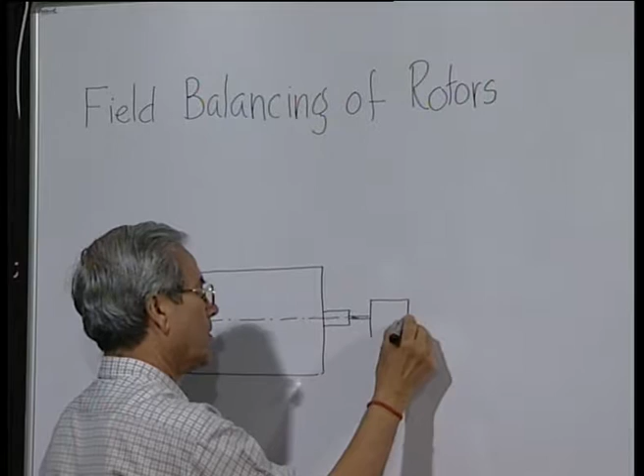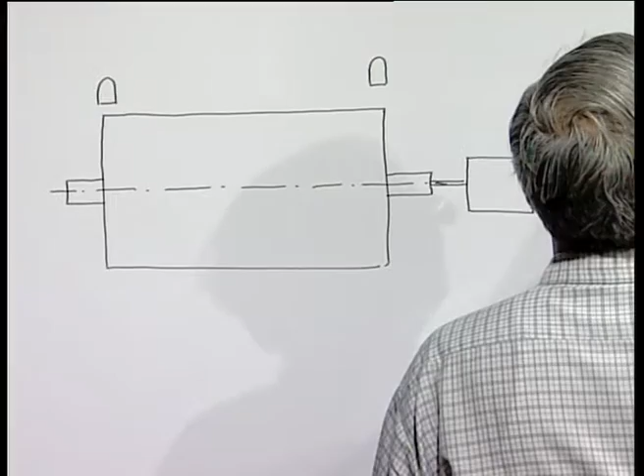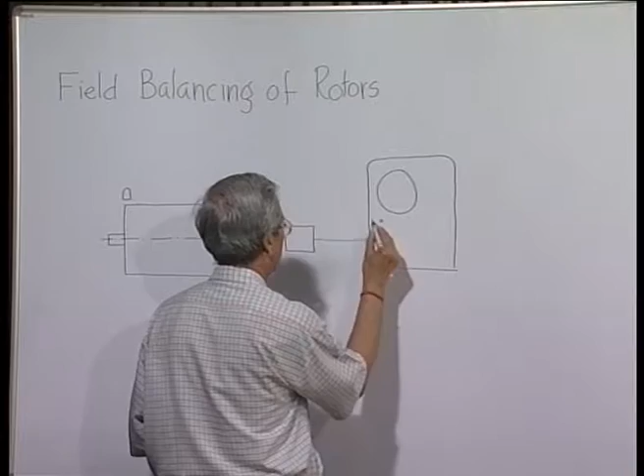We can connect it to a small device which we call a sine wave generator, and we have pickups at the two ends, and of course, we have a dual beam oscilloscope. So, the sine wave generator is connected to one, and the vibration pickups

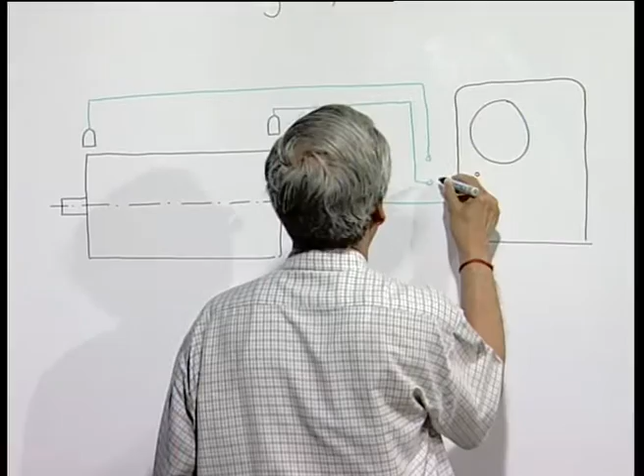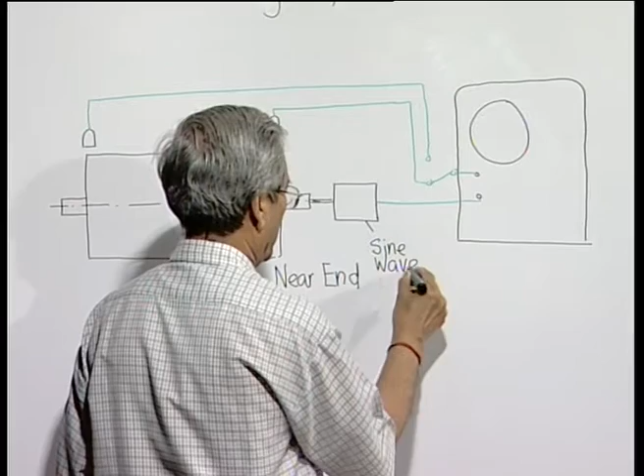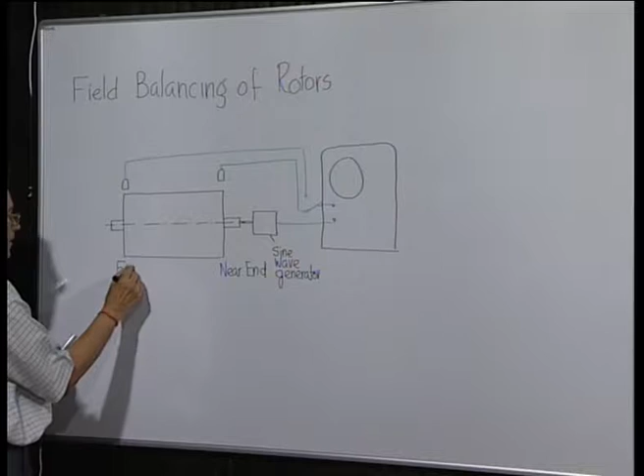are connected to this pickup, which we call the near end pickup. Near end means that it is nearer to the sine wave generator. And this is called the far end, and this is the far end pickup.

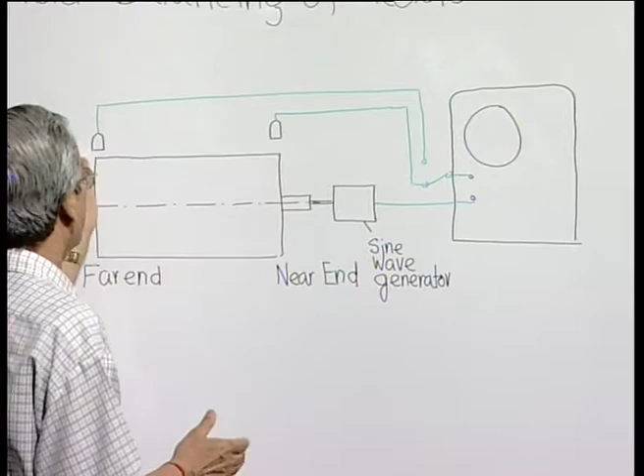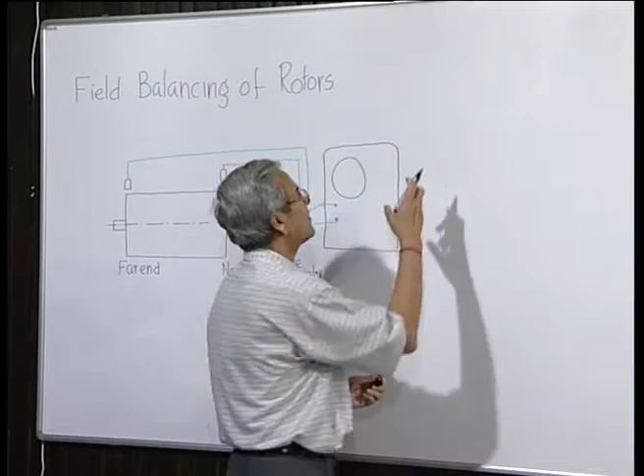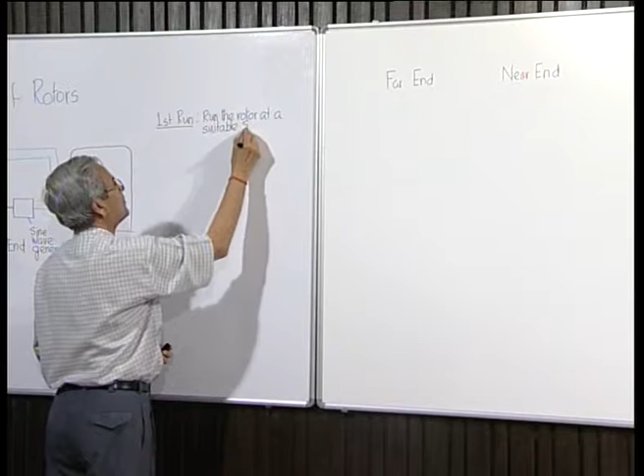Now, as before, we can rotate the rotor at sufficient speed, so that we get measurable vibrations through the pickups at the near end and far end, and at the same time the sine wave generator produces a reference sine wave. So, the first test is the first run: run the rotor at a suitable speed, so that we get measurable vibration, say a suitable speed omega.

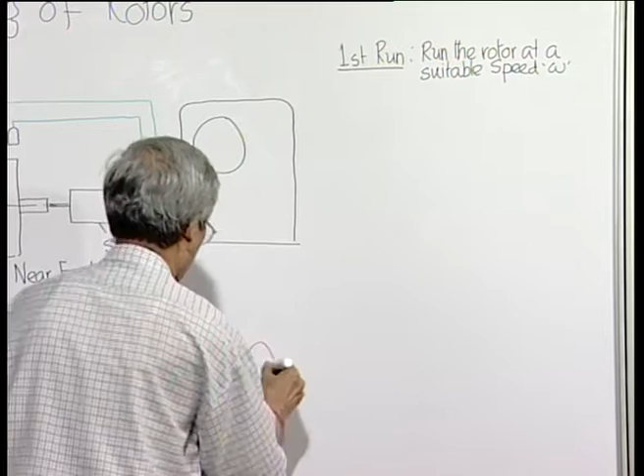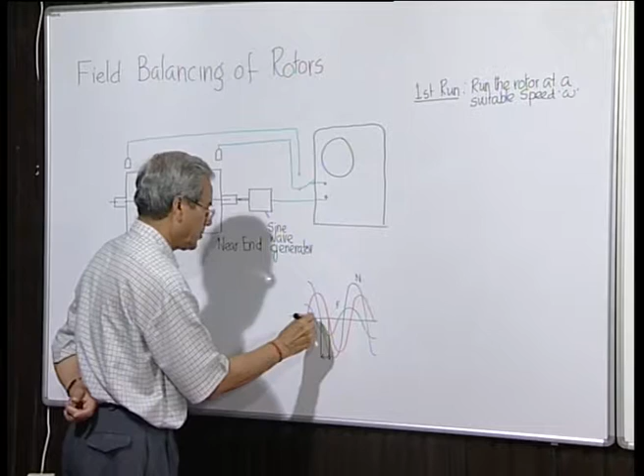Then, as we know already, the oscilloscope output will be giving a reference sine wave, and the other one, say near end, will be something like this, and the far end. So, these oscilloscope signals tell that this is the phase lead of the near end response, and this is the far end.

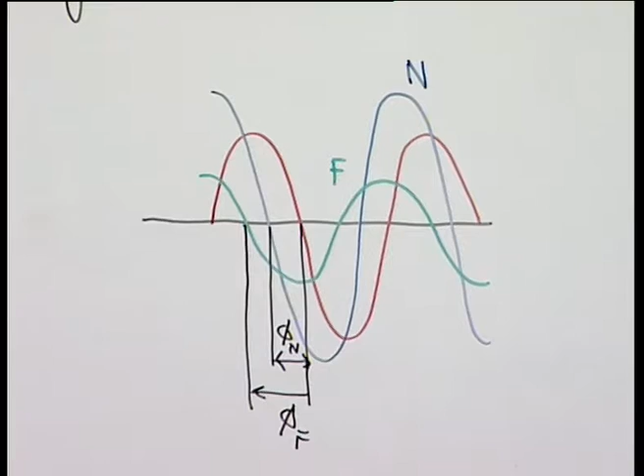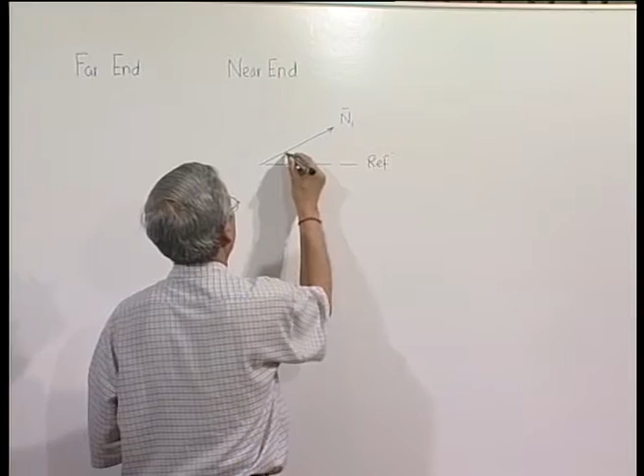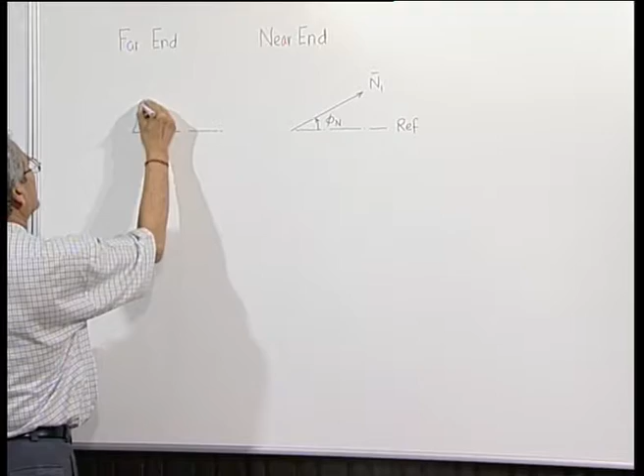So, the near end response we get as the N1 vector, and obviously the reference is here. The reference vector is nothing but the sine wave generator. Similarly at the far end, again the reference will be the same, and the vector representing the vibration of the far end is F1.

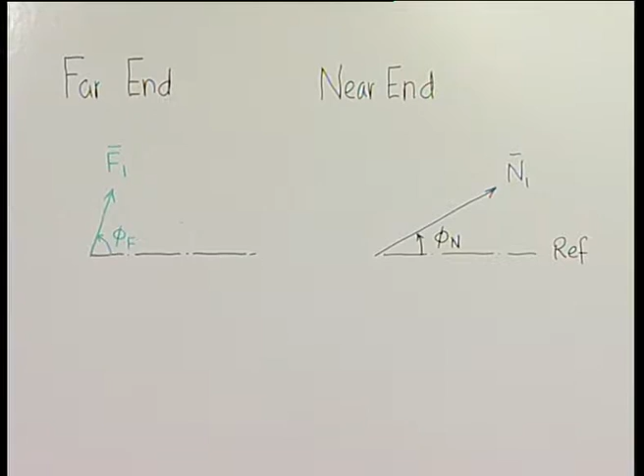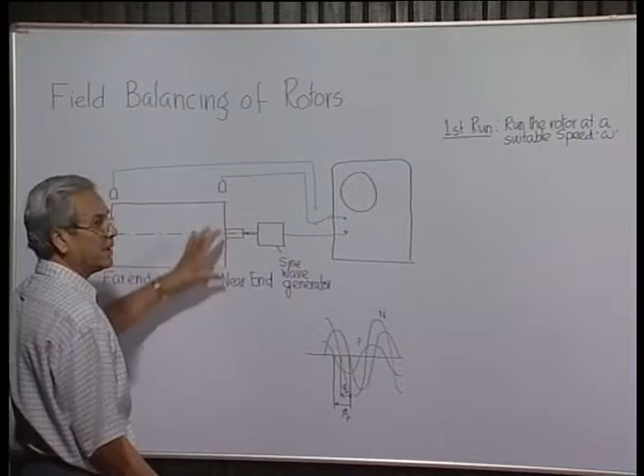So, let us see again what we have done. It is being rotated at a suitable speed, so that the near end pickup and far end pickup produce reasonably measurable signals. The sine wave generator is producing a signal as a reference. Then the vibration of the near end is measured like this, and the vibration of the far end is given by this. All of these are harmonic functions of time, because it is a case of forced vibration, and in all cases the frequency of vibration matches the speed of rotation. So, all these signals are of the same frequency.

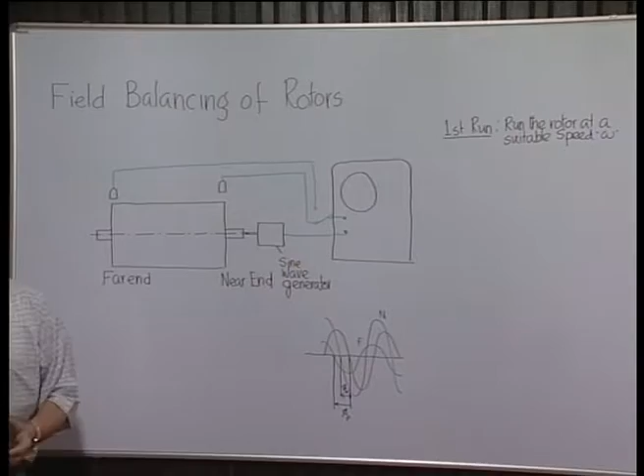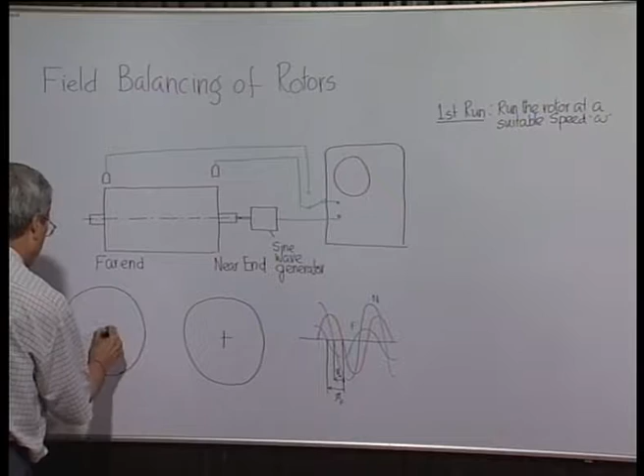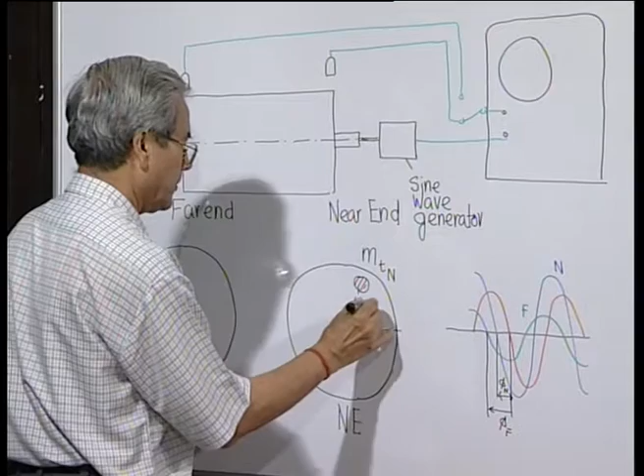Next, we stop the machine and let us see the near end and far end planes. This is the near end plane, this is the far end plane. We have a datum, a reference line marked, and attach a trial mass MT at the near end at a known radius at a known position. This is a datum.

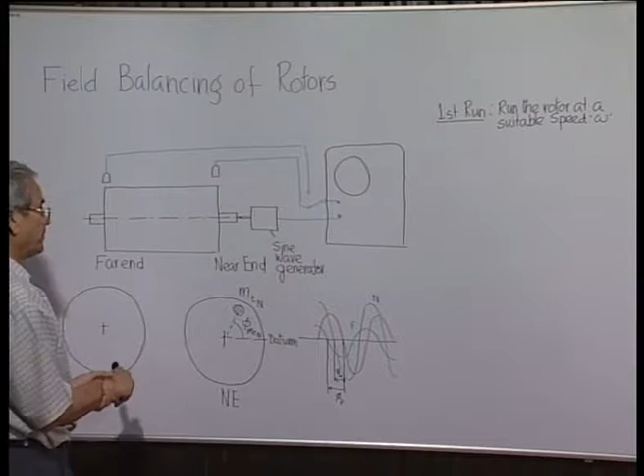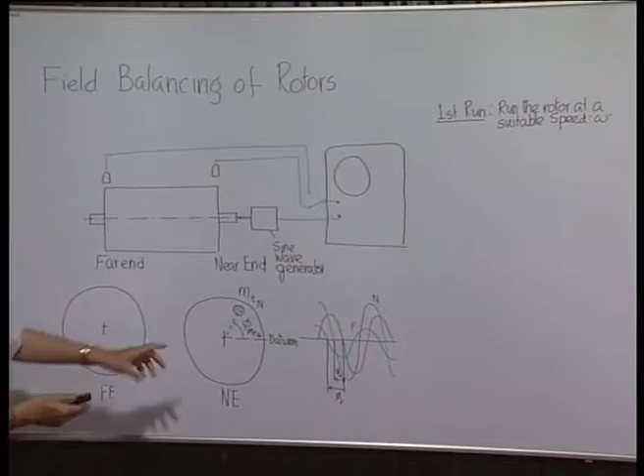After attaching this trial mass at the near end plane, you have to keep in mind that these are also the chosen planes for putting our balancing masses, or taking out material diametrically opposite the location of the balancing mass, as I have said in the previous lecture. Now, if we run the rotor at the same speed and again measure the vibration of the near end and far end, what do we get?

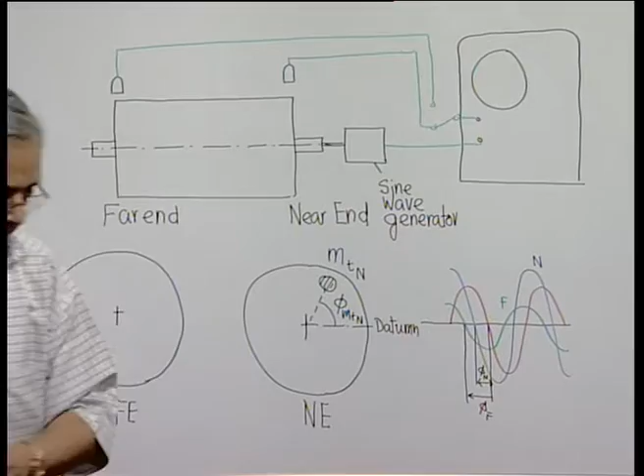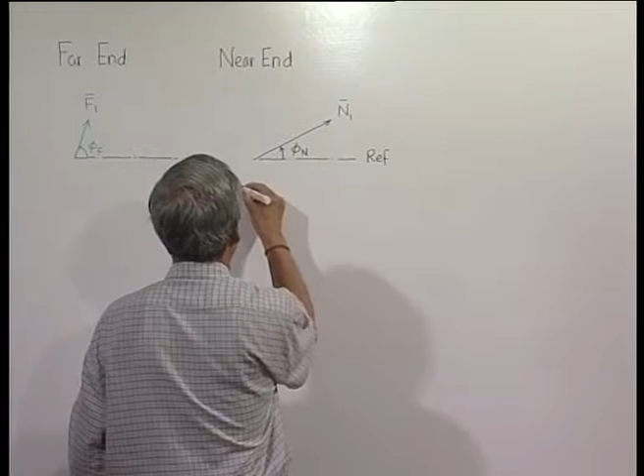Now, we will find that the effect of this trial mass which we place at the near end will obviously be more on the near end vibration. So, the vibration of the near end is now N2, and this is the reference as before. This angle is the lead angle of the wave found in the oscilloscope with respect to the reference sine wave signal.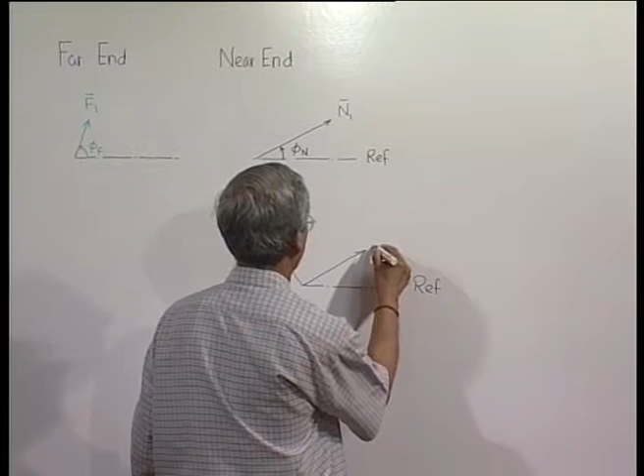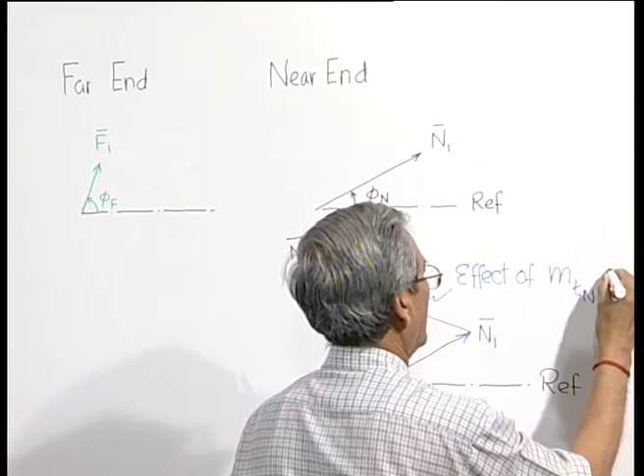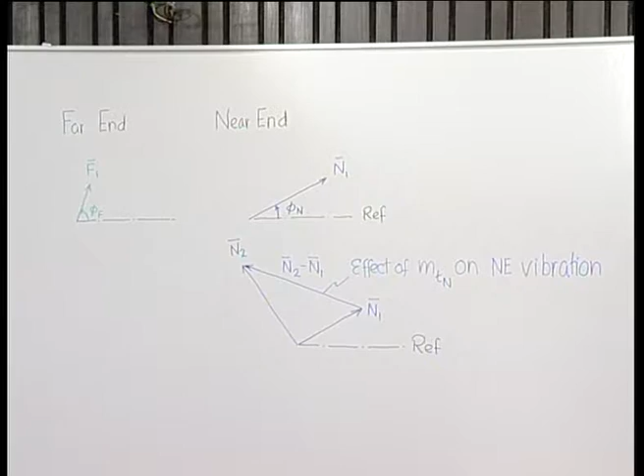Now, when we did not attach the trial mass, the vibration of the near end was this. So, this vector represents the effect of the trial mass on near end vibration. This is the original vibration without any trial mass MTN. This is the vibration of the near end with the trial mass. So, obviously, this difference is the effect of the trial mass only.

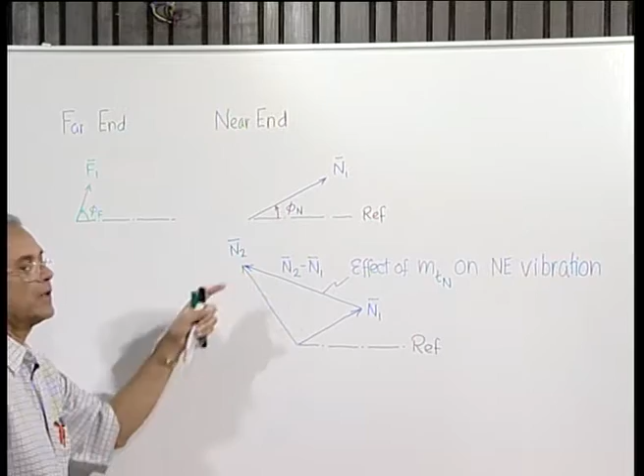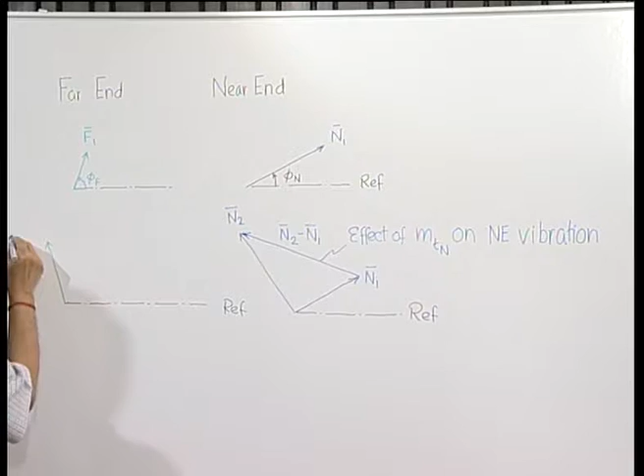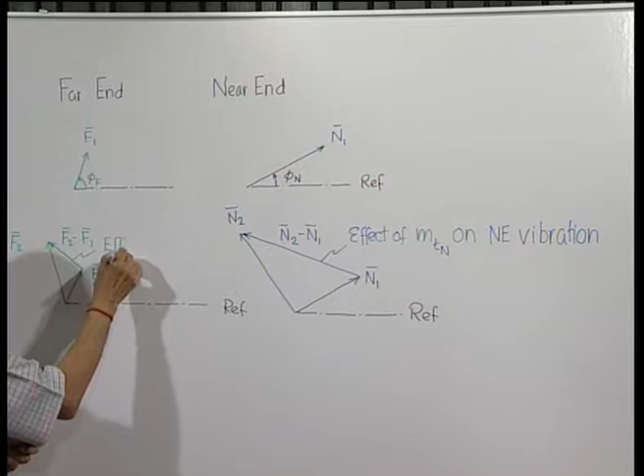Similarly, the vibration measured at the other end, that is the far end, will be something like this. The original vibration without MTN was F1. So, therefore, this increase, that is F2 minus F1, represents the effect of MTN on far end vibration.

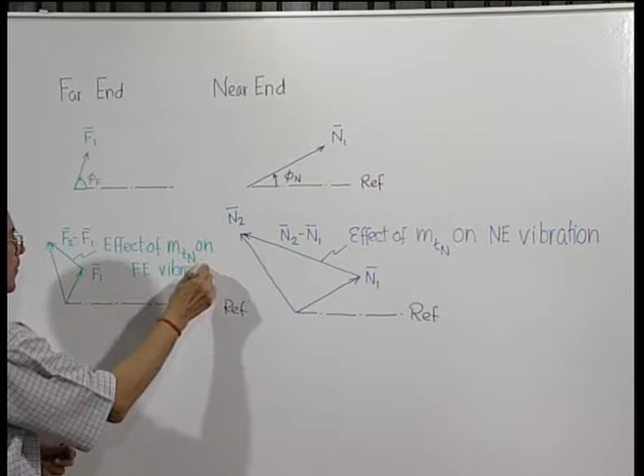Remember, these vectors are all rotating like a rigid body with the same speed as this, and the real quantity is the component along this. This is the way we represent a harmonically varying quantity. Okay. Next, what do we do?

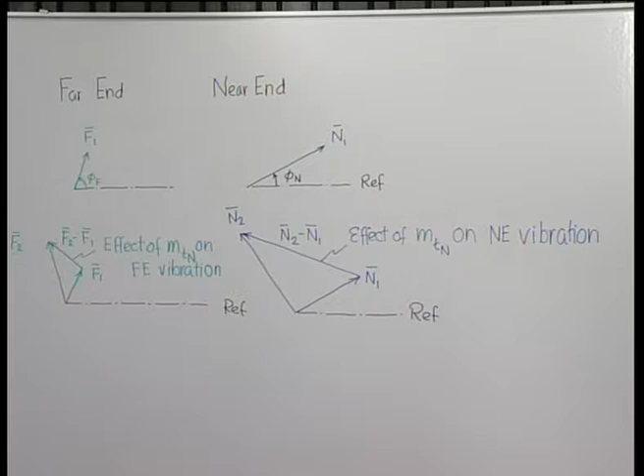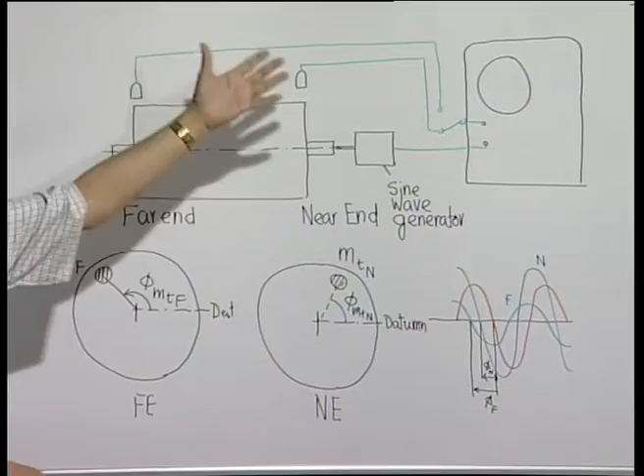We take out this MTN, remove it, and put another mass, and we call that mass MTF, at another known radius or known radial distance, at a known position from a datum drawn on this. Then again we run at the same speed, and the vibration at the near end and far end is again measured, both in amplitude and in phase. Then what do we get?

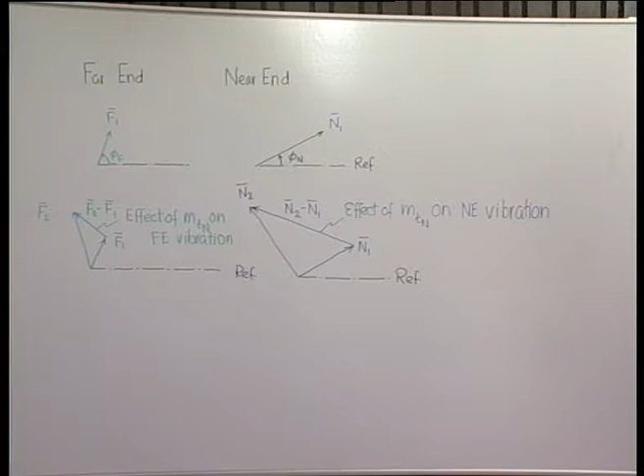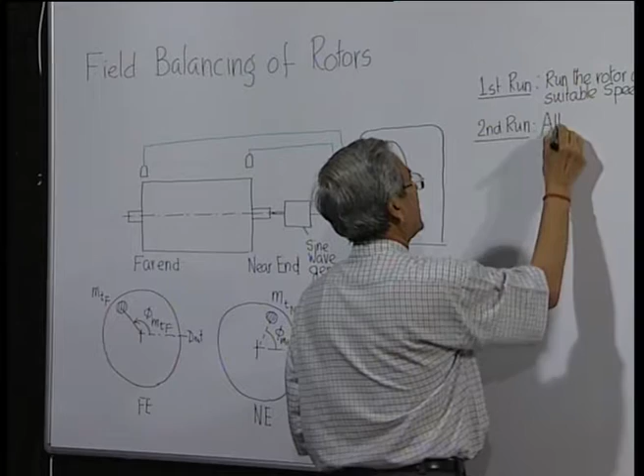So, we must complete also this second run. We have already completed it: attach a trial mass at the near end at a known radius and at a known angular position given by phi MTN. Then the third run at omega.

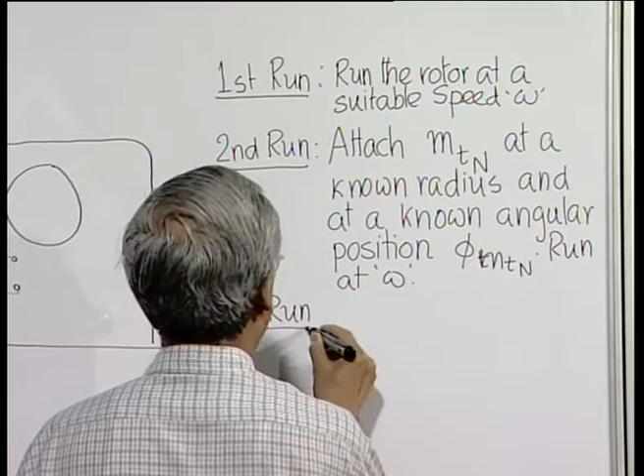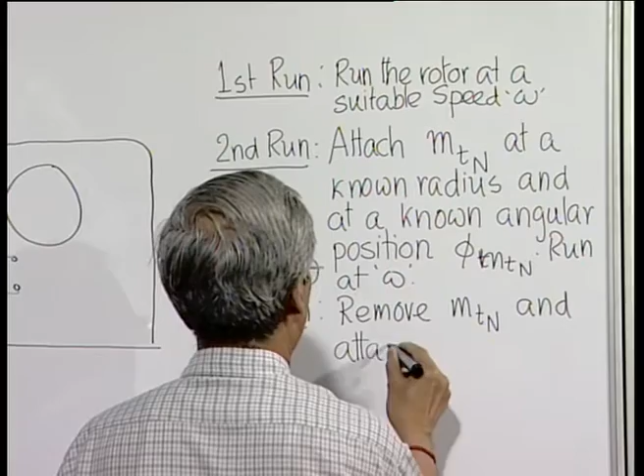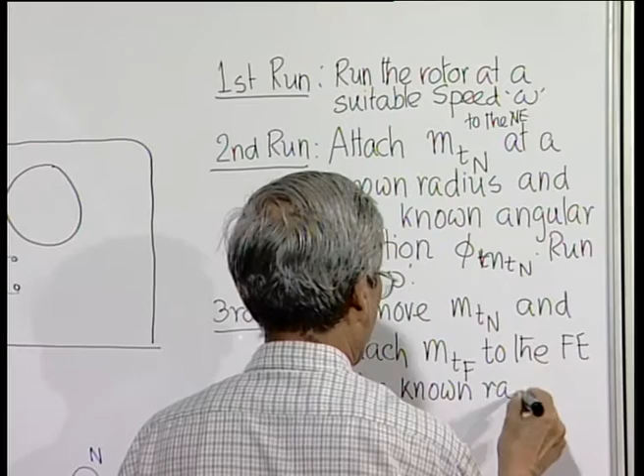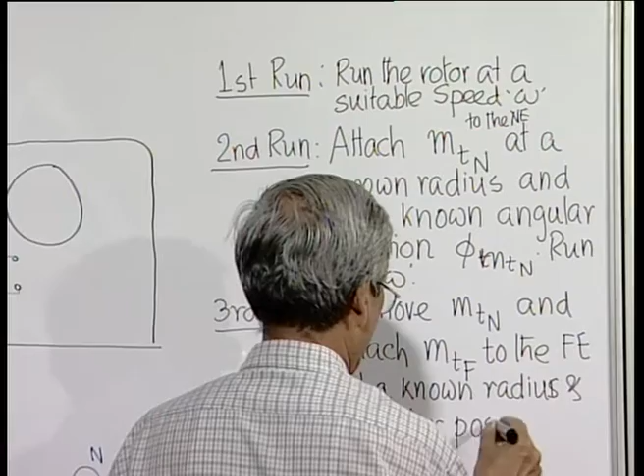Third run is: remove MTN and attach, I have not mentioned because space is not there, attach MTF to the far end at a known radius and angular position phi MTF, run at omega.

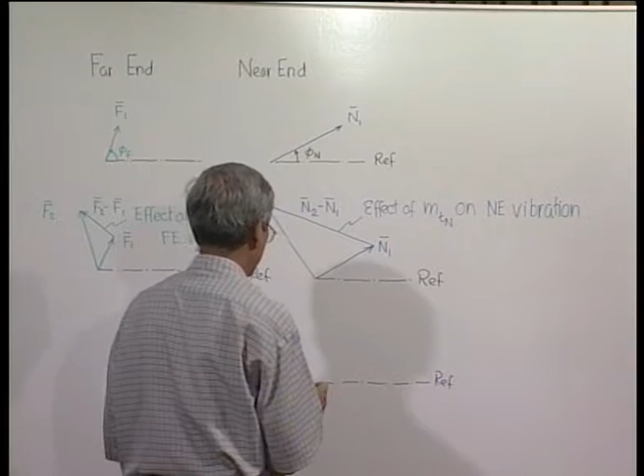So, now we again measure and we get N3. So, if this is the vibration at the near end without any attached mass, then this must be the effect of MTF on the near end vibration.

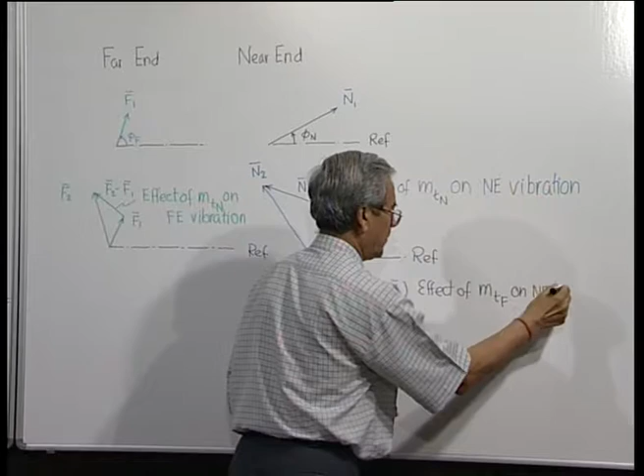Similarly, at the far end, the vibration is measured and we may get the far end vibration F3. The original one was this without anything. So, this F3 minus F1 must be the effect of MTF on far end vibration.

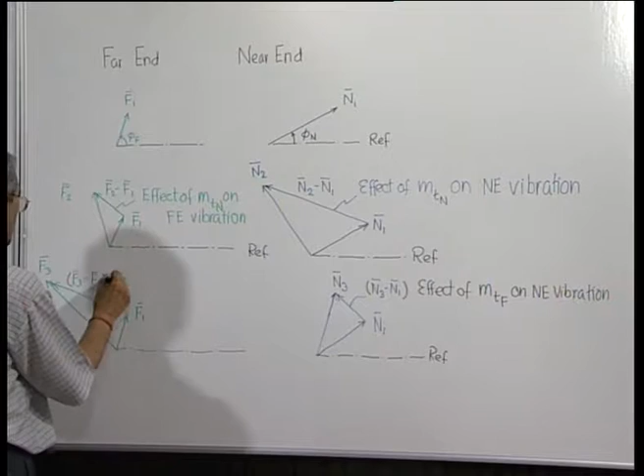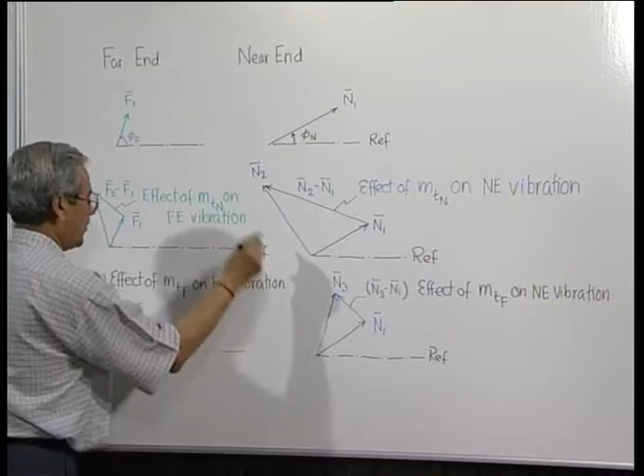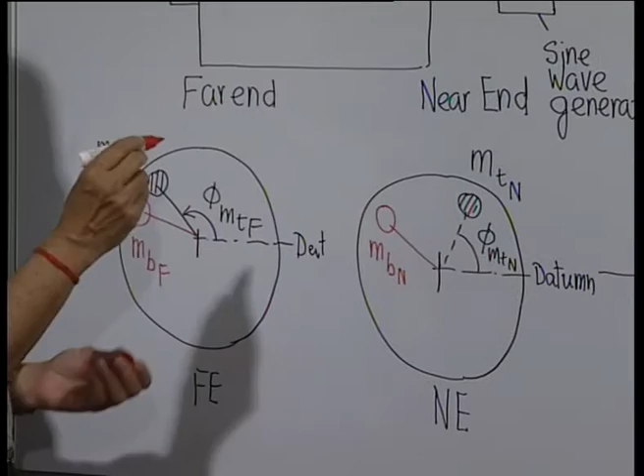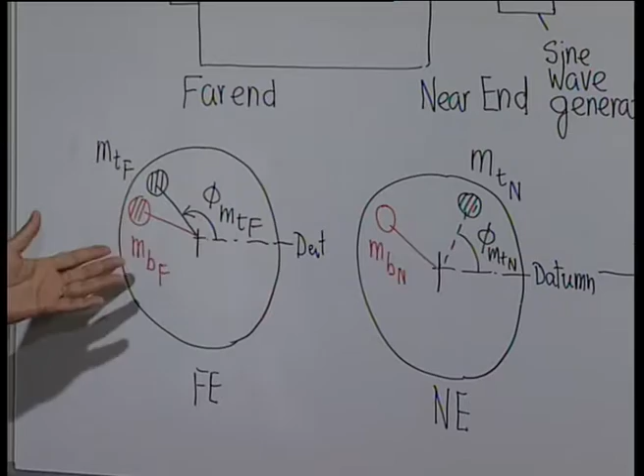Okay. So, now let us see what we can do after this. What we have to do ultimately is place balancing masses, say MBN and MBF. So, how do you do it? Remember that once MTN is changed to MBN and MTF is changed to MBF, then when both are placed there, the total vibration at the near end and far end should be 0.

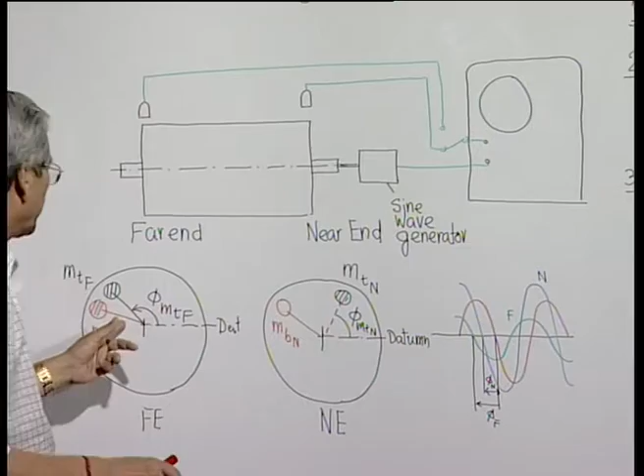That is, the effect of MBN on near end and far end vibration plus the effect of MBF on near end and far end vibration. When you sum the total, the near end vibration should be just minus N1 to cancel the original effect when no mass was attached, and the total effect on the far end should be minus F1 to cancel the effect of the original unbalance present in the rotor.

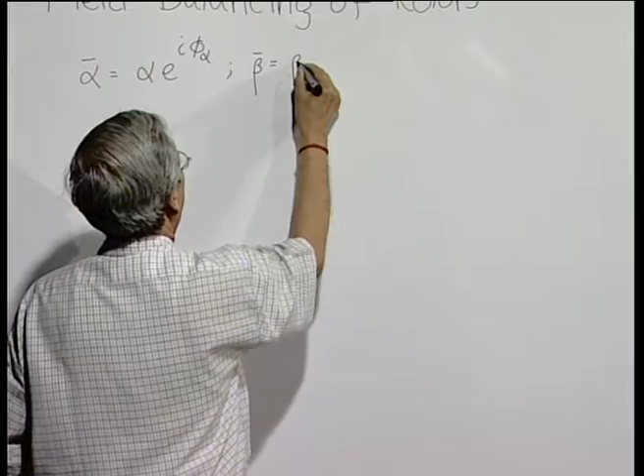Now, we have seen in the previous class how we represent these vector quantities. So, we will use that. We will have two vector operators: alpha, which is equal to alpha e to the power i phi alpha, and beta, equal to beta e to the power i phi beta.

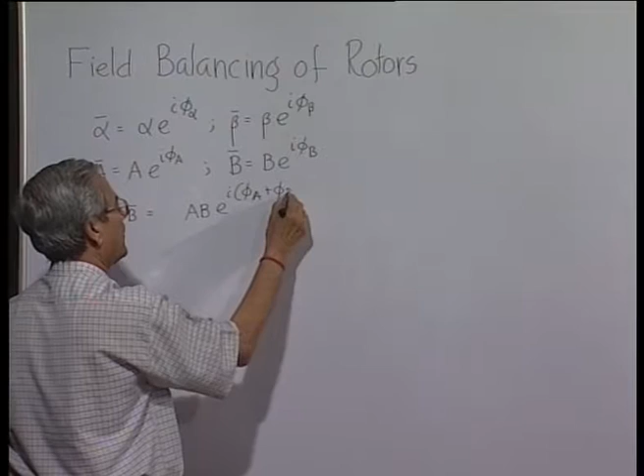Now, when two vectors, A represented by A e to the power i phi A and B equal to B e to the power i phi B, are multiplied, what do we get? We get a vector whose magnitude is the product of the two magnitudes and whose phase is given by the sum. So, remember this.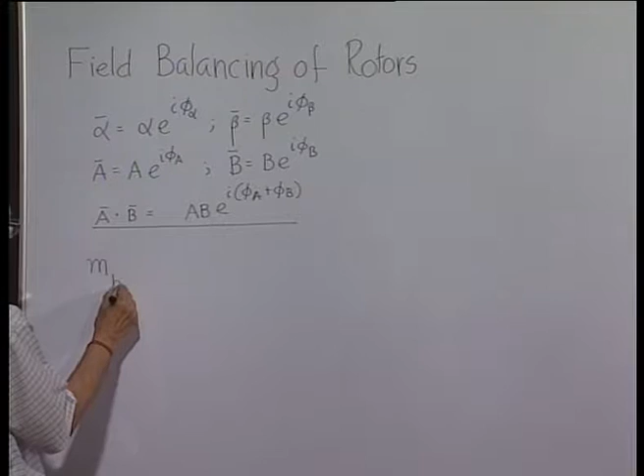Then let us see what we have to find out: MBN, if we represent it by a vector, because it has a magnitude and an angular position, that is direction, is equal to alpha operated upon MTN. The trial mass position is known. So, if I know alpha, then I multiply MTN by alpha to get MBN. This will be alpha MTN; the magnitude will be the product and the phase or angular location will be shifted by phi alpha.

Similarly, the balancing mass at the far end can be written as a product of beta with MTF; that can also be represented by a complex quantity or a vector, because it also has a magnitude and direction. This will be beta MTF, that will be the magnitude. So if we can find alpha and beta, that means the quantities alpha and phi alpha and beta and phi beta, then we can find the magnitude and position of the balancing masses.

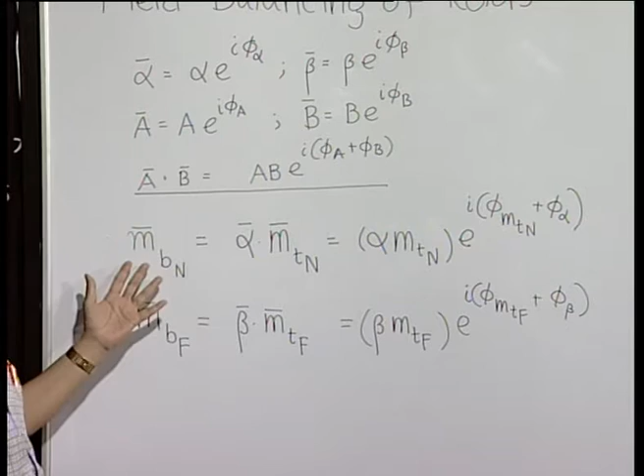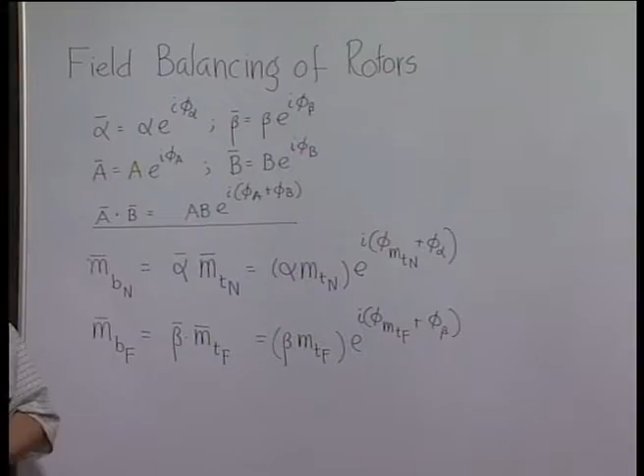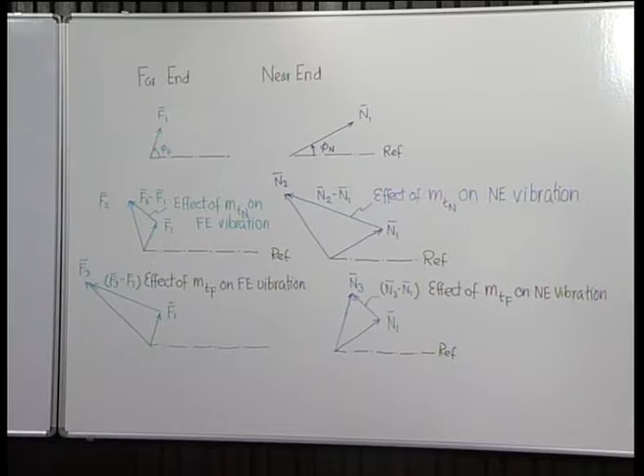But what is the condition? The condition is that when these are placed simultaneously, the total effect at the near end should be minus N1 and the total effect on the far end should be minus F1. So, let us see how we represent it mathematically. What is the effect of MTN at the near end? This one. So, what will be the effect of alpha into MTN at the near end? It will be alpha vector times this.

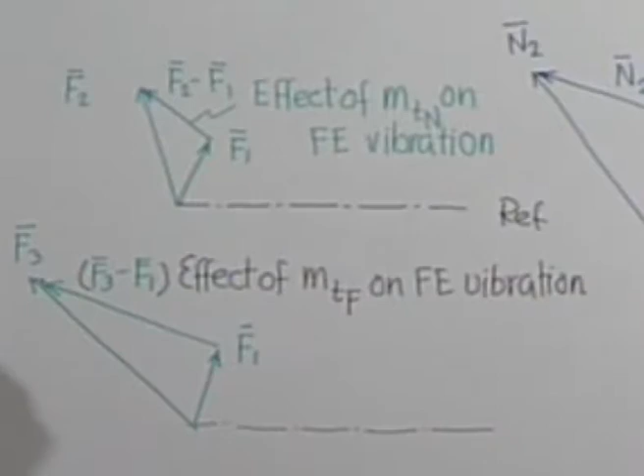This is the effect of MBN at the near end, plus what will be the effect of MBF at the near end? It will be beta into the effect of the far end mass at the near end, which is N3 minus N1. So, this will be the effect of MBF at the near end, and this total should be minus N1, which was originally present. So, when everything is together, it is 0.

Similarly, what will be the effect of MBN at the far end? It will be alpha into, and the effect of MBF at the far end. This will be effect of, we are doing the far end, this is effect of, sorry, we made a mistake, effect of, this is the effect of MTN at the near end. So, effect of alpha MTN will be alpha into this, effect of MTF at the near end is this. So, effect of beta MTF will be this, and that total must be this.

Similarly, here this is the effect of MTN at the far end. So, effect of alpha MTN at the far end will be alpha into this. Effect of MTF at the far end is this. So, effect of beta MTF, that is MBF, will be this, and this has to be minus F1. So, we get now N2 minus N1, N3 minus N1, all these things can be graphically found out.

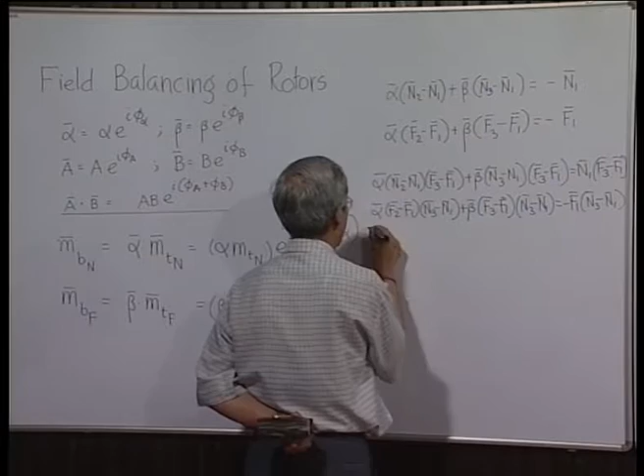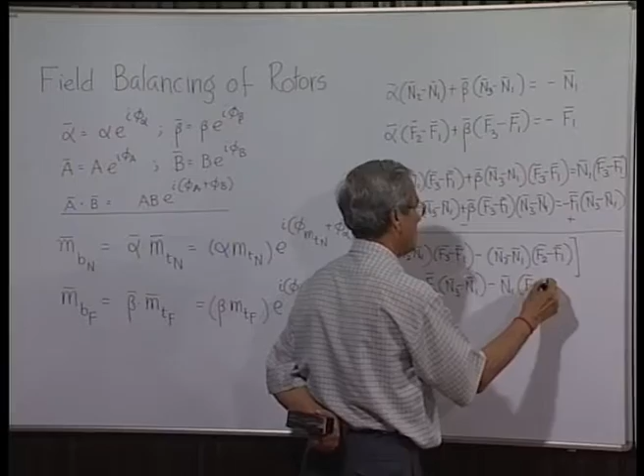This is the standard thing. So, we subtract this or change the sign and add, whatever you may say. So, what we get, alpha N2 minus N1 into F3 minus F1 minus N3 minus N1 into F2 minus F1. This cancels, is equal to F1 into N3 minus N1 minus N1 into F3 minus F1. So, finally, we get alpha vector as

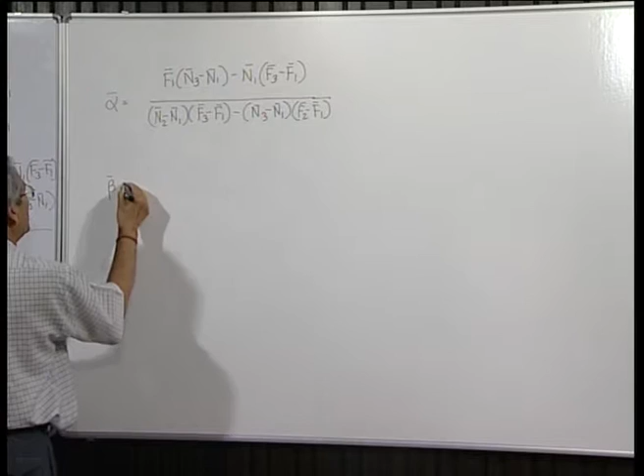Similarly, we will find out beta also, and in this case of course, you have to multiply this by N2 minus N1 and this by F2 minus F1, and then subtracting one from another, we will get

I think this is just solving simultaneous equation. So, ultimately solving these quantities by graphical construction will give you alpha e to the power i phi alpha. This will be beta. So, at the near end, this is the reference or datum. Our near end trial mass was here, at a known angle. What we have to do?

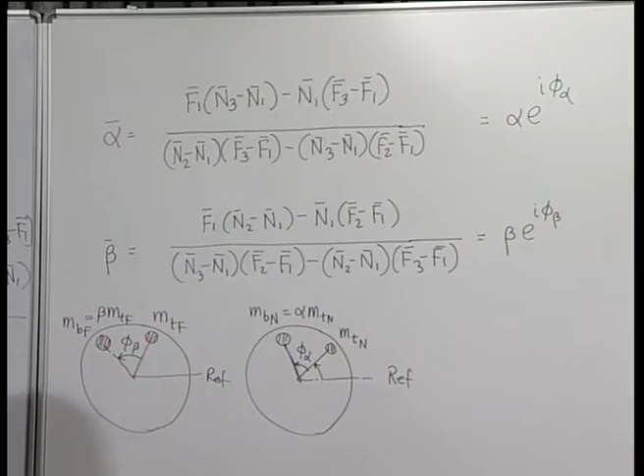The last thing which I would like to mention briefly is that so far we have considered balancing problems where all the bodies were perfectly rigid, but in actual practice a rotor may not be perfectly rigid and it may have significant deflection or elastic deformation. In such cases, these methods will not work. For that, we have to follow a methodology which we call modal balancing. That method is more involved, and we will not discuss it here, but I just wanted to mention it so that you are aware of the problem.

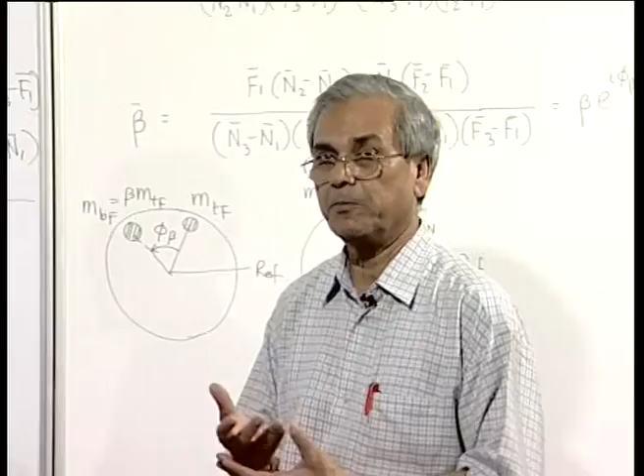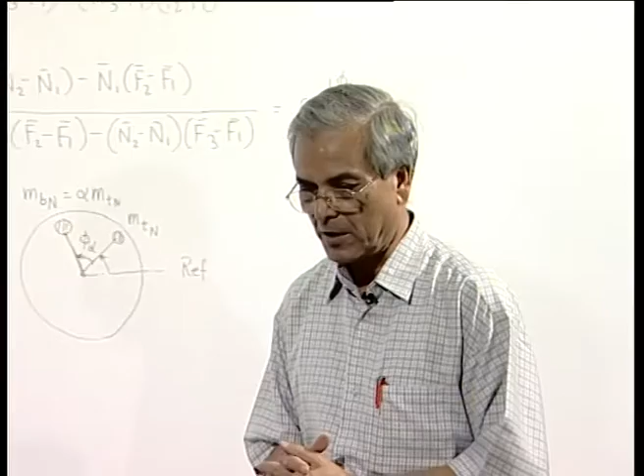The other kind of rotary balancing problem is where the mass and geometry of the rotating object is not definite, as in washing machines, where we put wet cloth whose geometry, shape or mass are all uncertain. In such cases, a suitable technique is used for self balancing of the rotating objects. That is also a very interesting technique. But we will stop discussion on rotary balancing here, and from the next lecture we will take up the problems of balancing machines, where the systems involve reciprocating objects.